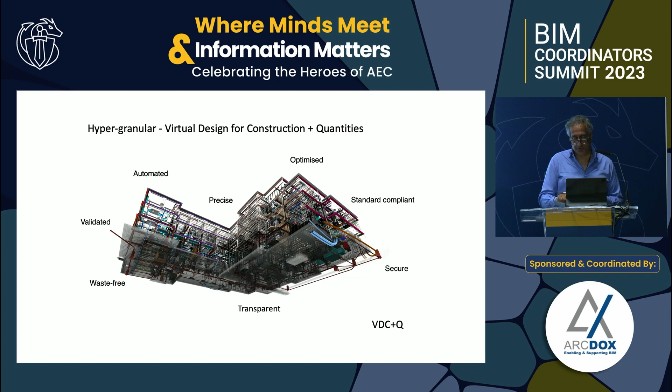So yes, we build very accurate BIM models, yes we build files that are good for design for manufacture, off-site manufacture. We're really big into virtual design for construction, because BIM can mean many, many things. But in the way that we use it, in every way, not in a...

...over the hills and far away kind of way, where you might get this in 3 or 4 years time - this is what you can have today, and what works today, what we've proven over time works for us. And we're compliant, so we're not coming off the standard - we are using ISO 19650. Almost everybody says they're compliant, and in my experience, almost nobody is. We've also been paperless to site for 5 years.

So what was the promise of BIM? Coordinated, accurate, reduced risk, lower cost. We have all of these. In short, really, reducing your risk, reducing your time, increasing your reward. But has this really happened, you know?

So secret number one is everyone's using BIM now. When I first started using it, people thought I was silly, but now everybody is saying they're using BIM in one form or another. But in that same period, we're not seeing the productivity. We're not seeing it applied. It's not that we're not having it applied, we're not seeing the outcomes for everyone. And so those are some of the things I really want to delve into a little bit.

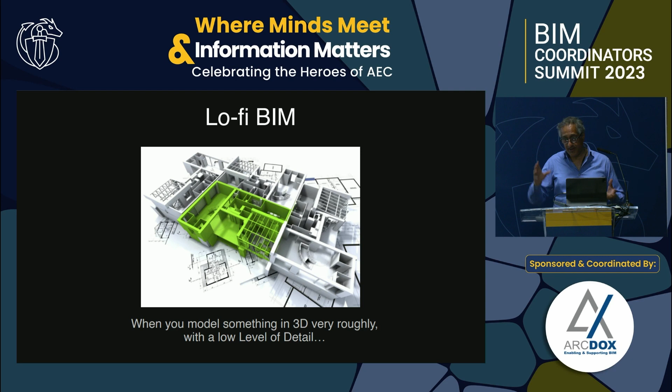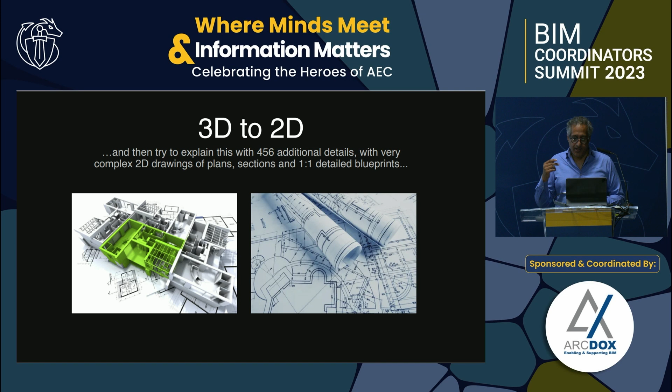So, lo-fi BIM. This is what I think most people get. They may think it's hi-fi BIM, but it's lo-fi BIM, and they get a model if they're lucky. Here's a model of your building, sir, this is what it looks like. But when you do that, great, you've got a model that looks like your building, but then if you're trying to explain that building from 3D back into 2D, that means a lot of 2D drawings, plans, sections, elevations, and so on. Well, you're gonna lose a lot of that information in translation. You've got to, don't forget, all that information's got to go to the guys who are building it, right? And it's all in different places, and that's when you've got to find the mistakes, and that's where all that heartache's going to begin for you.

So what's happening today? Today we are working 3D, and we make those models to make PDFs of 2D drawings, and then we try and build a 3D building. 2D drawings, really, you need to be well trained to understand that abstraction and to fill in the gaps and make sure it's there. We're losing those talents. In the construction industry, your average age of worker is 49. Only 3% of the people in construction are under 21. So we don't have the skills that we used to have. We don't have the person who will sit down and understand where the gaps are. We're losing those people.

So we try and eliminate that noise by saying, let's go 3D to 3D. Let's be very accurate about it. Let's tell them where every bolt, where every piece of glue, what every tile goes, and how it gets there. Single source of truth, the graphical and non-graphical, they should all be saying the same. You shouldn't have to be trying to decipher that information. It should be the same, it should be coordinated, it should work.

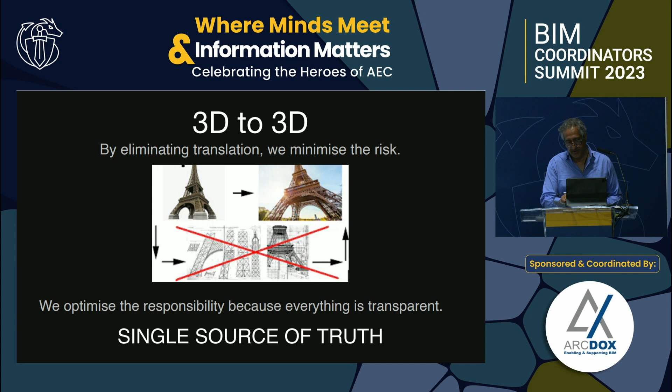So I'm going to go a little bit into the benefits of how our journey has been, how we've experienced it, and how we use it. And I have to admit, first of all, we do work in a bubble. We control the design, we control the construction process. And that's how we get our results. So it makes a lot of sense for us.

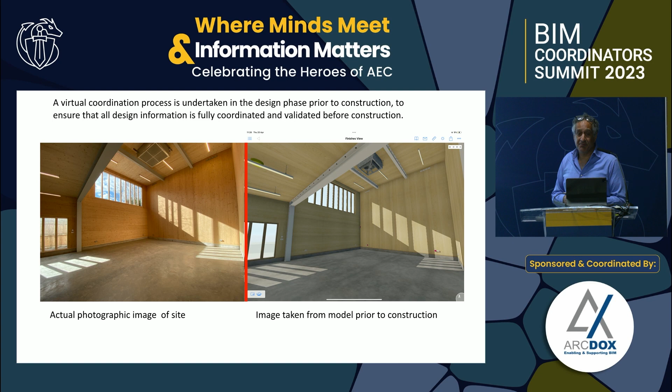So what I'm showing you here is a model on the right. That model has got details of everything in it, down to the screws. Every screw is individually programmed, every socket is known. That's the result that you get from the building afterwards. Now that building above ground was built in 3 months, completely on budget, completely on time. Digital O&Ms, all information in one place.

To end off, I'm happy to give you a fly-through of what our vision of BIM looks like, what hyper-granular looks like. But before I do that, I want to be careful to say we go to a lot of detail, but everything we model is purposeful. We're not going to model a nail for the sake of modeling a nail. If we build a CLT structure, the screws that hold that structure together are very important, so it's important there's reliability and somebody put those screws in and they're going in the right place. So I'll try and switch over now from the presentation and go into where we are.

I'm going to just swap this model out for a moment, I'll come back to this one. You can see I have a lot of models on my machine, and in the design process we produce a model a week, and there's a reason for doing that. We check everything in the virtual as if it were the real, until the model has been checked and checked and checked, and it's reliable, we don't go to site. Or that's the way we like to do it most often. Occasionally it happens the other way, but I don't recommend it.

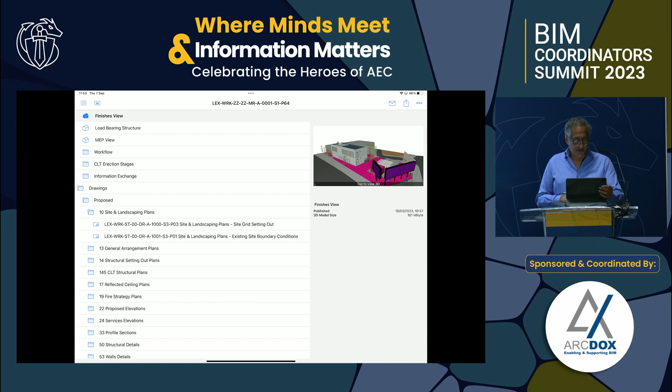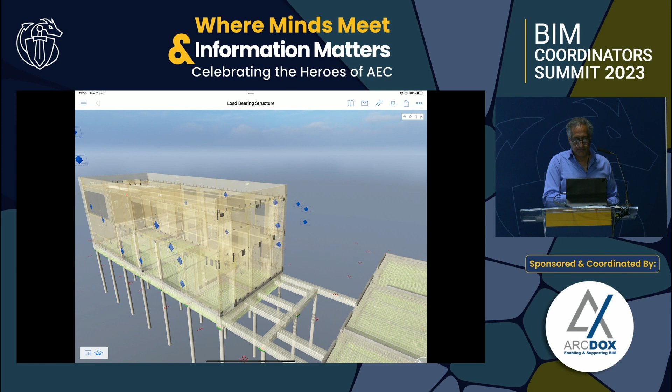I'm going to start off by showing you a small building. It's actually the building you saw earlier, but I'm just going to show you the level of detail here. So when we say we model down to every screw so people know where they are, it genuinely is there. I'll try and get right into the detail of it here.

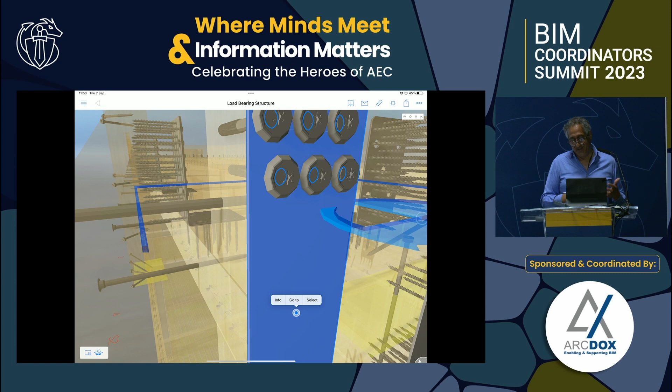So if I pick up a screw, there we go - it'll tell me what the screw is, who made it, and the product code on it. It'll also tell me the information on the plate behind it, and that's what the guys on site use. It's not kept amongst the consultants, it's what everybody has. Within the same model, they've got an MEP view as well.

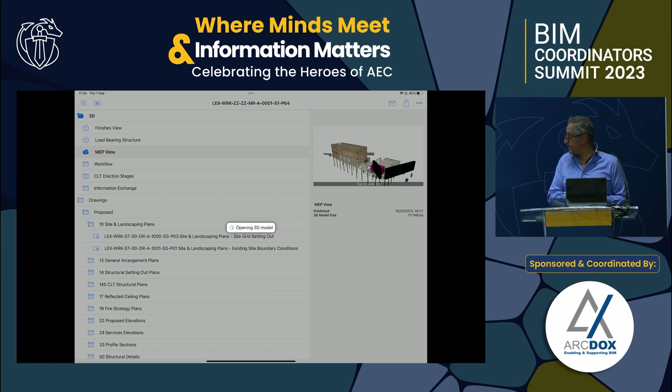And that's opening here. Within that MEP view, everything's colors are also to international standards. We can pick on a part here within that, and it should tell us what that part is also - manufacturer, who made it, and so on.

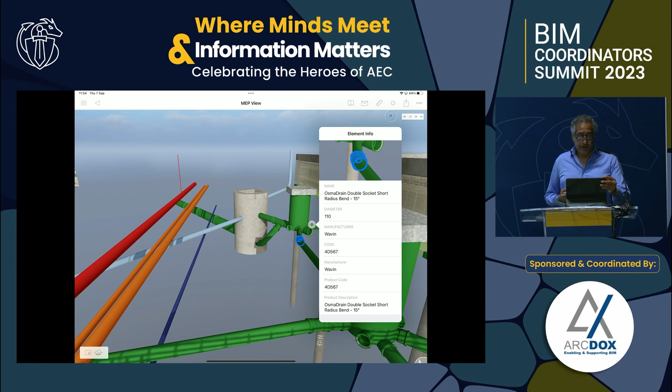You can get a lot more out of these models, and I'm going to swap to another model now. People sometimes ask, what about an old building? So I'm going to show an old building being renovated and how that works. I don't have a huge team of people doing this - I have 1 or 2 people on a model maximum.

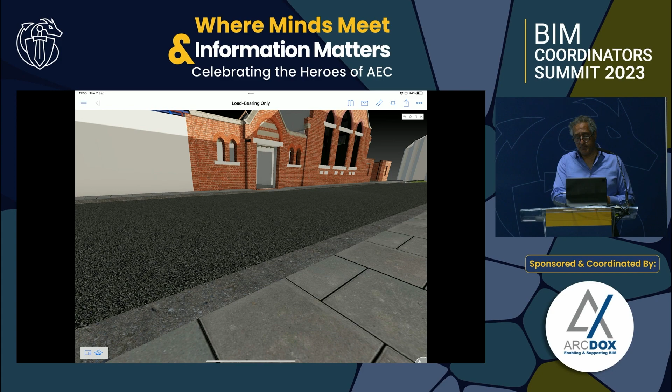Okay, let's start from the beginning. So here we go - when we strip out the building, this was an old derelict church with an old derelict industrial unit at the back of it, and it was being turned into a cultural center for artists.

You can start with saying you can put your daylight study in here, and you can check even that within - you don't have to go to another consultant, you can do it all in the one place. In fact, you can put in the day and time and check exactly where the light's going to be, and it really should be that easy.

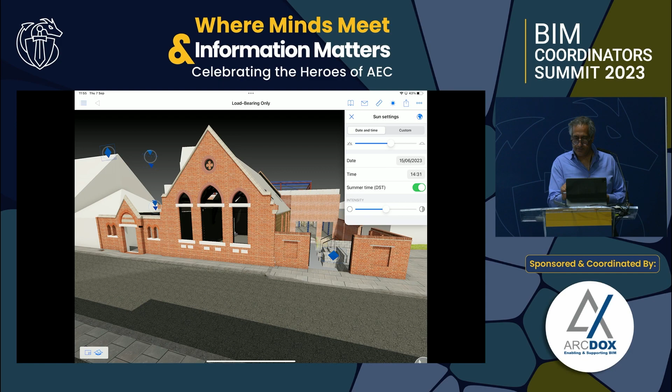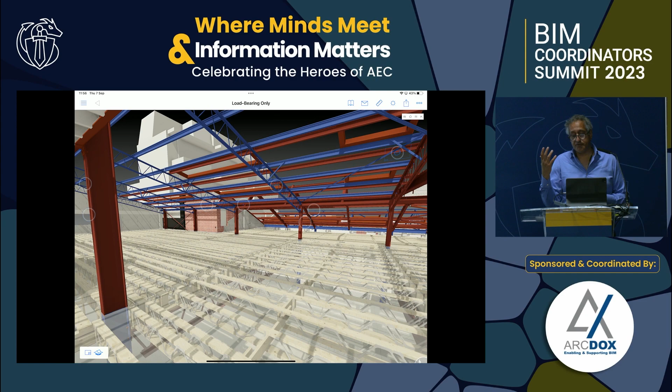Let's go back here for a minute, let's just close that off here. And as we go into this load-bearing model, you can see that the rebar is there for something that's going to be a fountain in the future. There's a lot of ambient information - the red part of the building is what's existing, and the blue is what we're going to add.

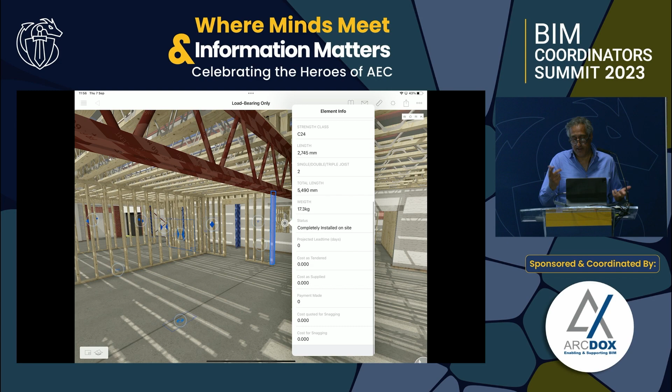Each one of the elements here has all the data you need - whether that's a posi joist or a single piece of wood, you know the location that wood's going to, what its strength class is. I could bore you with this for a long time - the length, the weight, whether it's installed, what was the lead time. You can fill all this stuff in the same place, and you should be able to do it as easily as that.

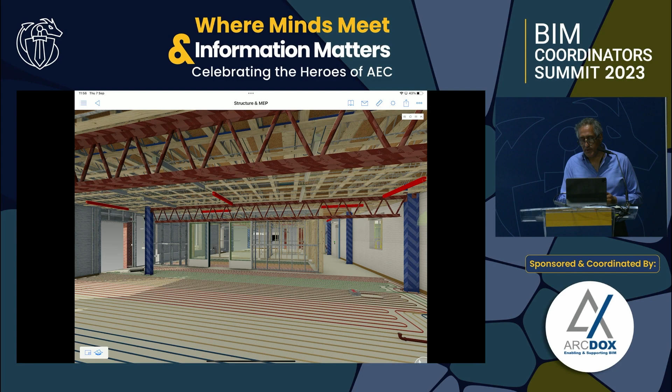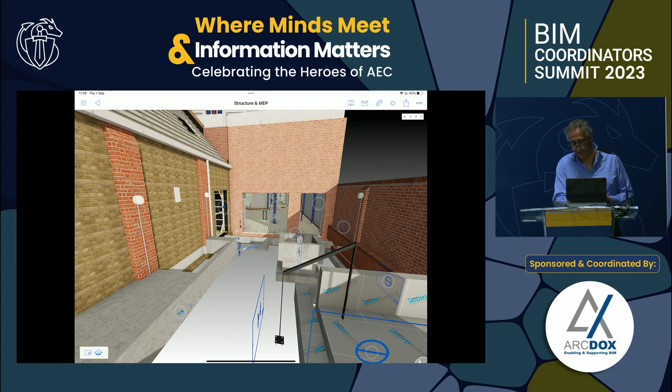Then we're going to go for the same building that you've seen with its MEP view. I'm just going to take you back outside so you can see what happened. Now the concrete's been poured over that rebar we saw on the foundation at the beginning, and a few pipes have gone in.

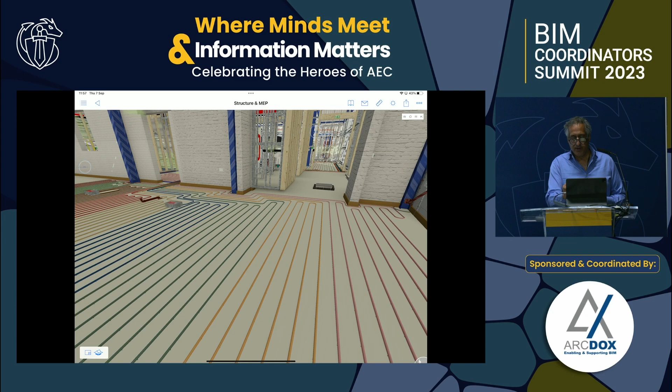These are all your underfloor heating circuits, complete with even the clips that hold them down. As you go through the building, you can ask for a piece of MF and it will tell you what the MF is, so you can quantify it, absolutely.

The big thing is, how much are you throwing away all the time? We know exactly how many pieces are in our building. We don't throw anything away. They call our building sites the Swiss building sites because nothing turns up that isn't used. We've reduced our skips, where it used to be normal to have a skip on site every single day, but anyone in the industry knows how expensive those are now. Our skips have gone down by a factor. We only have wrappings going in the skips now. We have very little building waste.

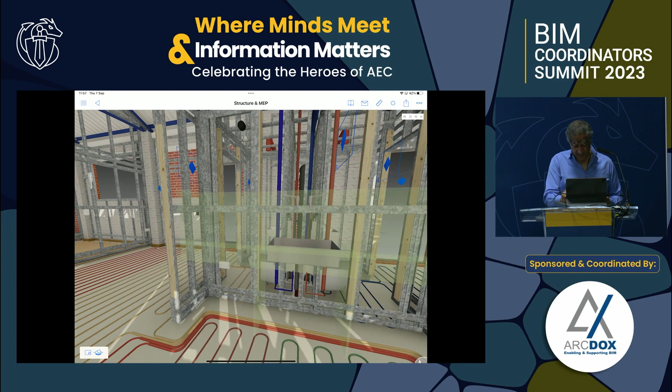If we go into a tap here, for example, as a digital O&M, you can just go and ask, well, what's that tap? And you're going to get that information there. That's for the client, your model for the client trying to fix their building, to know what the light bulb is, what the color was, where did the tap come from. All of that should be in one place, available to you.

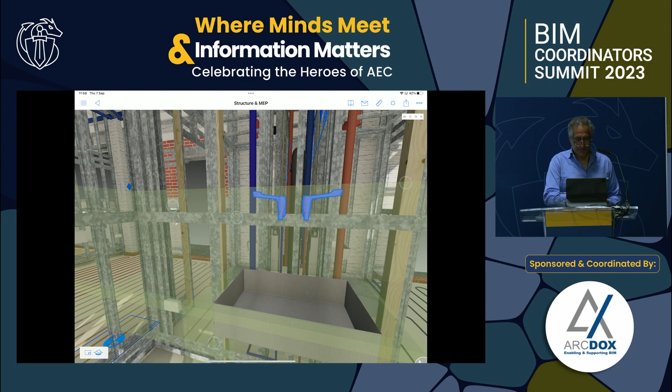Oops, sorry, let's deselect that. Right.

So I'm going to go into showing you what else happens. People like 2D, they do like 2D, and if I'm trying to persuade everyone to just go 3D, I may have a problem. But what you're seeing here now are all the drawings that are automated off the system. If anybody wants, and it's going to take me a moment or two to do, let me pick a drawing here, for example.

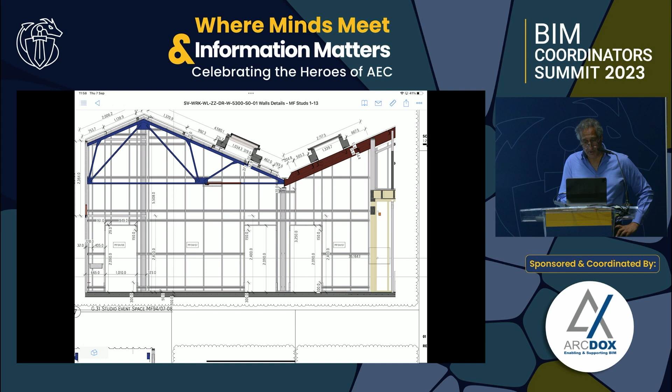When you throw a bit of automation in, you can simply just look at the detail in the drawings. That's automated off the model, all the markers, all the measurements, everything's automated off.

And we can, oops, sorry, I've done the classic, I've crashed it. They're normally reliable, so I'll give that a moment to load. Okay, let's go again.

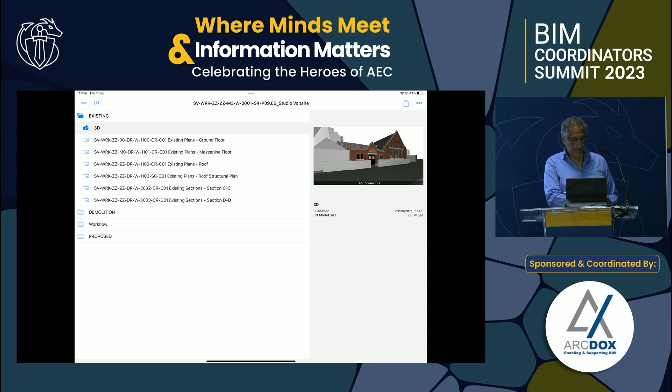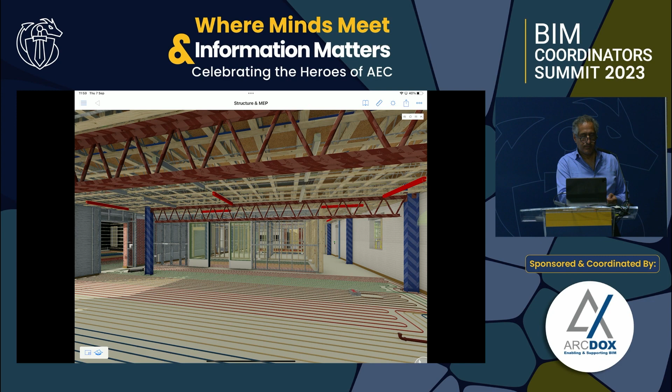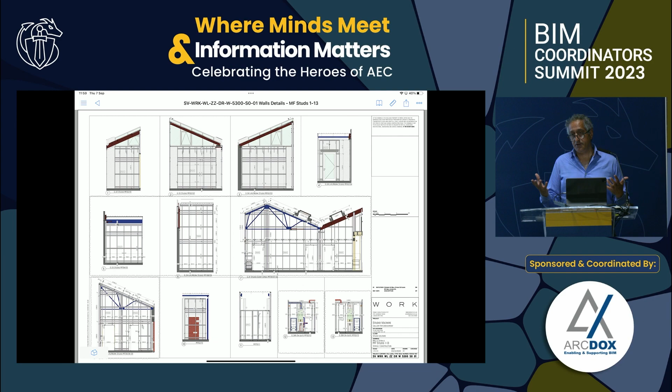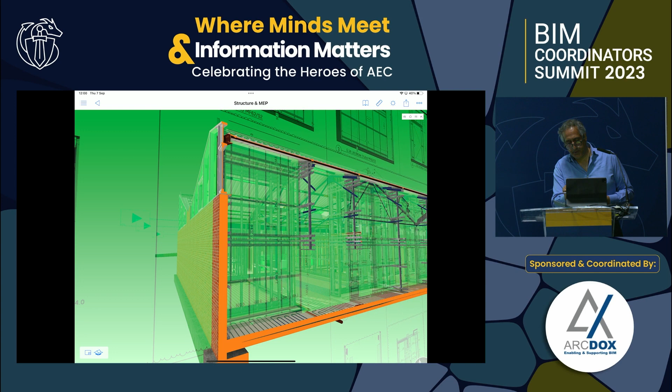When you have a 2D drawing, that should also relate back to the model itself. So if all we have to do is highlight a wall that we want to look at, we should be able to find that wall in the model, and anyone building it can see where it goes and how it works. I'm just going to rotate that a little bit around so you can see it. It makes the life of the guy fitting it simple, easy, clear.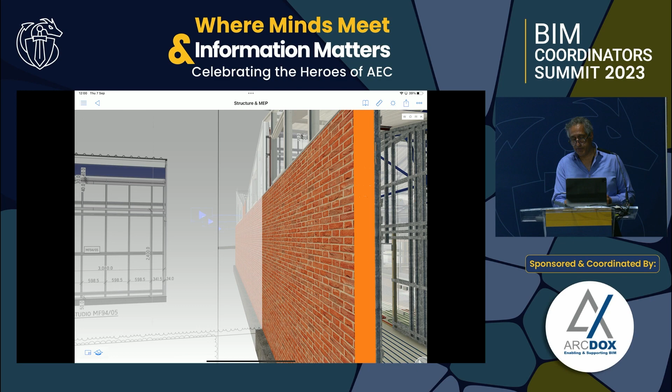And then, of course, if you want to, you can just bring out your building to wherever you want to see it. It's the same information, all collated and coordinated in one place.

There's one last thing I'll show you. If you want to know where your money is going, where your spend is, well, we have every single part in the building. We can locate the parts and we can tell you where they are and quantify them for you.

Let's have a look here, make sure my zones are on. Okay. Anyway, this is a list of all the parts in the building. I was going to try and show you one other element in it, but essentially, we have a quantity for everything in the building, whether it's your lights or your fittings. You know where they are, and you can locate them all from here.

And so all of this information is less than a gig, and it can live on your phone, and it can live in your office, and you can refer to it any time you want. That's a model for the client that stays with the client, not a model for the architect or the engineer or any of the consultant teams. They've all played their part in building it, but that's the piece of digital information that you should want to take home with you. And I think that's about all I have to say on this.